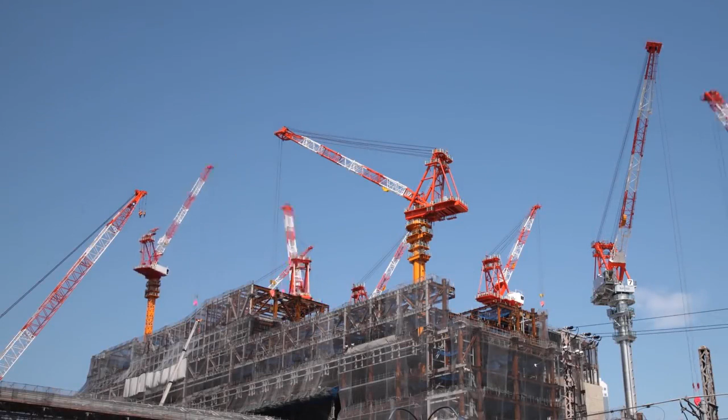The government has responded to this problem unsuccessfully with ridiculous attempts to ban rents from rising, a solution akin to banning a sick patient's temperature from rising. The only cure for this fever will be to increase the supply of housing. That is, increase the supply of housing while minimizing cost. Let's first focus on optimum height.

While some are calling for high-rise buildings in Dublin with the idea that it will lead to increased density and greater supply, buildings that are too tall don't translate into affordability as they cost too much to build. In theory, taller buildings reduce square meter costs of floor space the higher you build and increase the overall returnable revenue from a single plot of land. However, the cost increases as you build higher and higher.

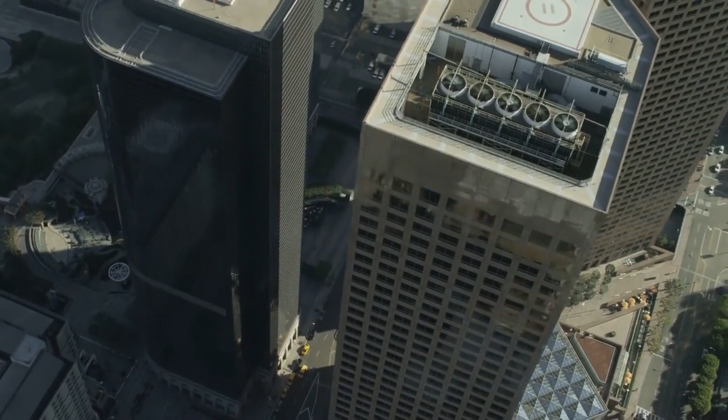Lift systems, fire prevention measures, water supplies and pressurization, and heating and cooling systems all add to the cost of high-rises. Costs like these lead to a U-curve in regards to the cost per square meter and height, where the cost per square meter initially decreases with an increase in height and then starts to increase after the height reaches a certain point due to the increased engineering demands. Every curve therefore has a bottom out point.

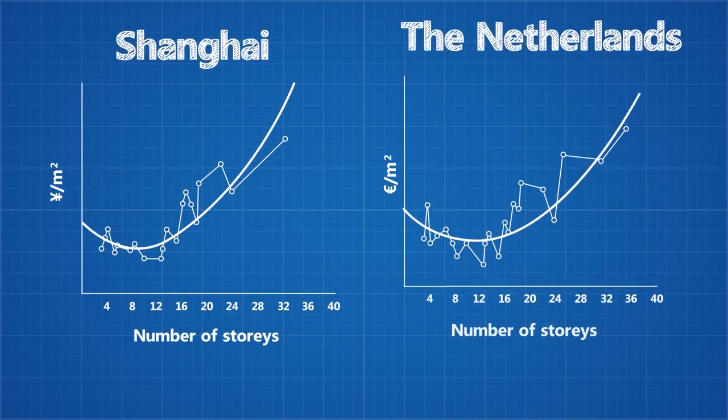This bottom out point is different in every city and varies widely even within the city. But on average, the lowest cost per square meter in Shanghai and in the Netherlands, for example, is around 8 stories. In Hong Kong, thanks to the limited land area increasing land cost, it's around 12 stories. The additional cost of engineering can be marginalized by high costs of land, making it worthwhile to build higher.

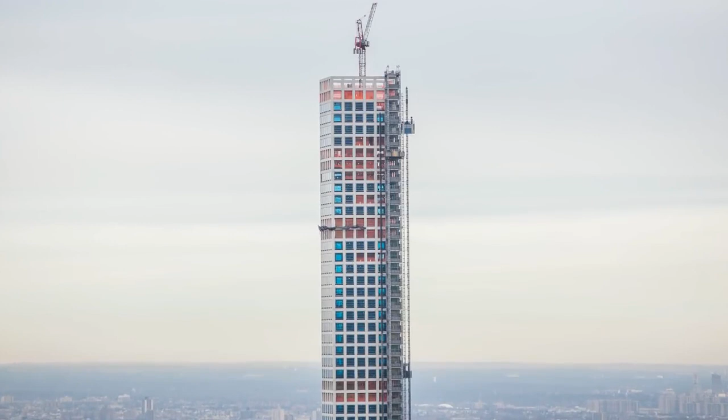Take the extreme example of 432 Park Avenue, the tallest residential building in the world. Built on the site the historic Drake Hotel once occupied, centrally located with Central Park views, the site became one of the most valuable plots of land in the world at 520 million. Now it goes without saying, this building was not constructed for the average man.

It has over 85 floors with 38,000 square meters of usable floor space, but only 104 units for people to live in, each costing millions of dollars. But the point stands, where there is exceptionally high demand, you can build higher. The cost of land in Dublin doesn't come close to those of Manhattan or Hong Kong though.

So in most cases, the bottom of our U-curve, i.e. the most cost-effective height to build to, will be between 6 and 8 stories, with a recent Irish government report even suggesting as high as 12 stories in some areas. Let's next focus on minimizing the building cost of these buildings.

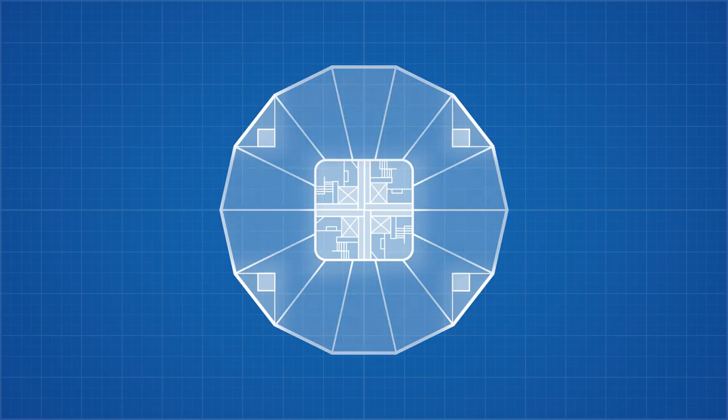One of the primary causes of increased cost with increased construction height is the necessity of using floor space for the structurally integral building core, which keeps the building standing and houses elevators and other services. While there are many ways to design the shape of the building, certain floor plate designs end up being more desirable than others to maximize usable space.

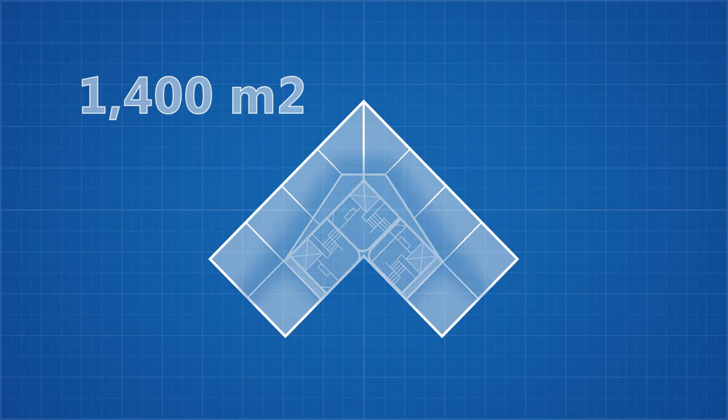Say that the gross area of the floor plate of this building is 1400 square meters. The core of the building of this shape and size would need to be around 335 square meters. This gives a net area of usable area of 1065 square meters, and thus a net to gross ratio of 1.31. So a design like this is stylish, but when you analyze the space efficiency, it's not great for maximizing floor space.

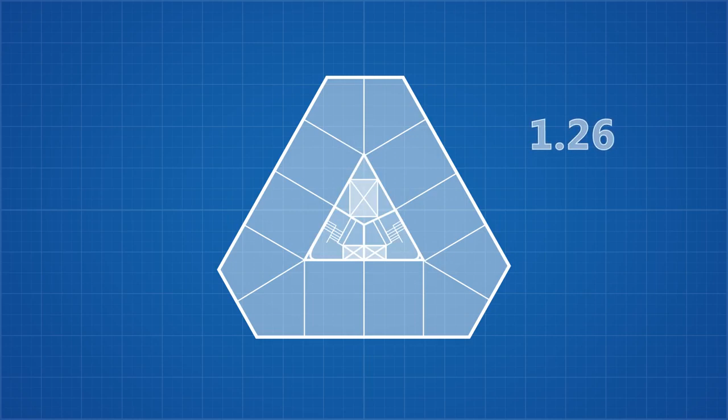While variety and expression in building design are important, these elements invariably add cost and require careful design consideration. When affordability is an issue, simpler designs are better. Wall-to-floor ratio is also a critical measure of cost efficiency. It expresses the perimeter length of the wall that has to be constructed for every unit of floor area, so from a cost perspective, the lower the ratio the better.

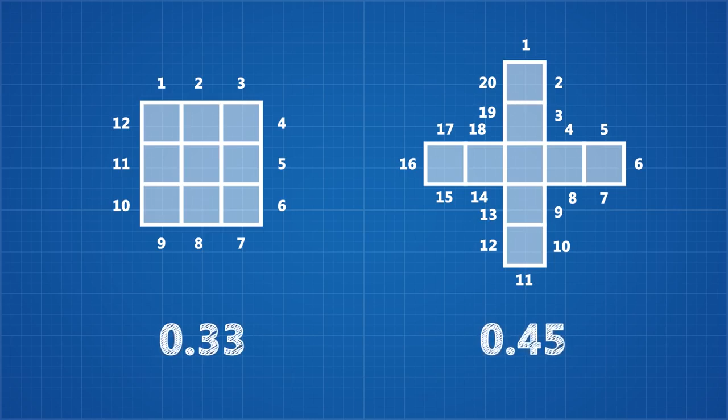Using simple geometry, we can see that a 3x3 square has a total perimeter of 12 meters. This would have a wall-to-floor ratio of 0.33. A cross shape with the same area of 9 square meters has a perimeter of 20 meters. This would have a wall-to-floor ratio of 0.45. When constructing buildings, this simple principle is the same. The more perimeter wall needed per floor area, the more expensive things get.

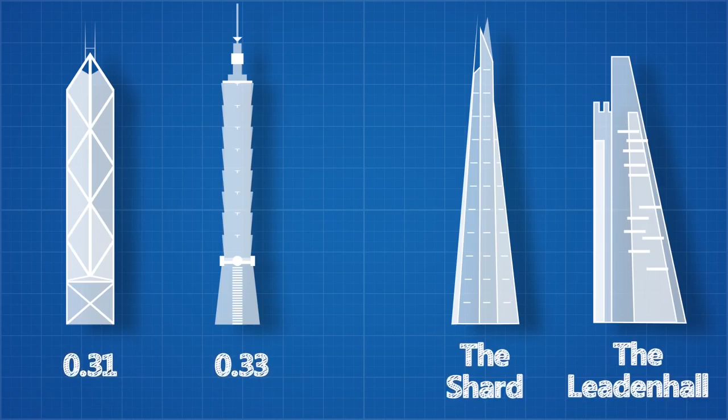A comparison of Asian and London towers provides an interesting contrast on approaches to wall-to-floor ratios. Tall Asian buildings score between 0.3 and 0.35, while London buildings score between 0.35 and 0.6, with the majority above 0.45. This is because the Asian buildings have larger, more regular floor plates with centrally located cores.

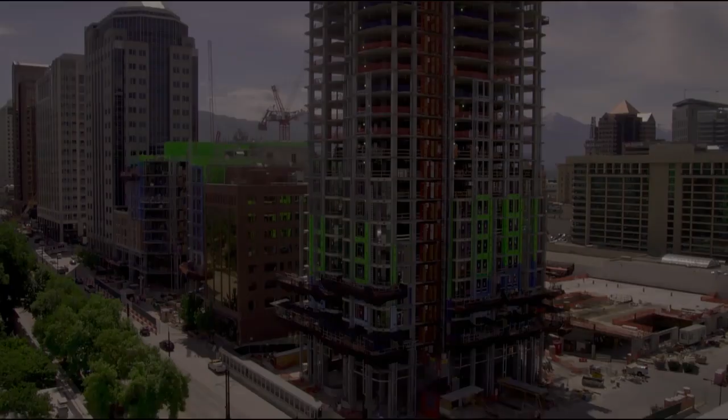So the design of our tower has huge effects on our cost, but so do construction techniques. Traditionally, towers are built using repeating floor design with molds called formwork being used to cast the concrete structure. Despite this essentially being a vertical assembly line, it can still be labor intensive and slow and is exposed to variabilities of site and weather conditions.

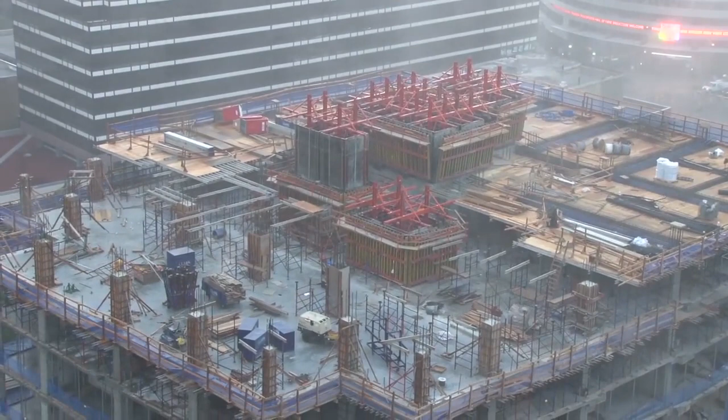Prefabrication and off-site construction is increasingly becoming an appealing option. This can offer high-precision solutions created in factory conditions and often reduce on-site delays and help progress construction even in a market with a skills shortage. On some construction projects in Dublin already, concrete products and timber frames are being fabricated off-site and assembled on-site.

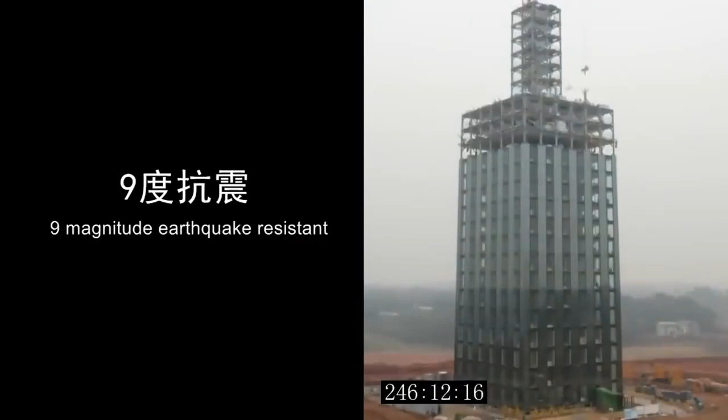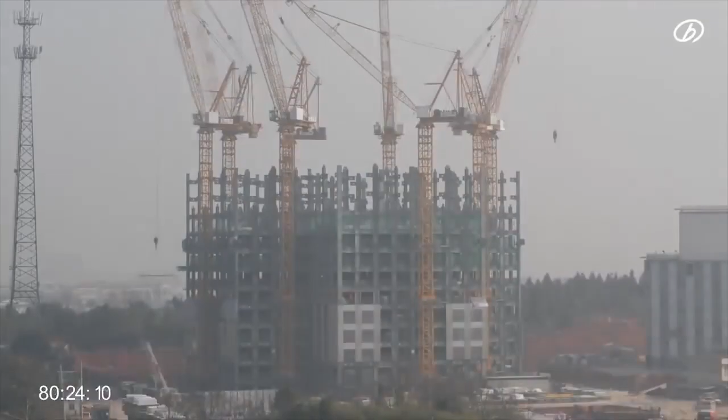An extreme example of this idea of prefabrication is being used in China, where a company called Broad Sustainable Building built a 30-story building in 15 days for a cost of just $1,000 per square meter, and later built another 57-story building in 19 days. The building pieces are fabricated in sections at 2 factories in Hunan.

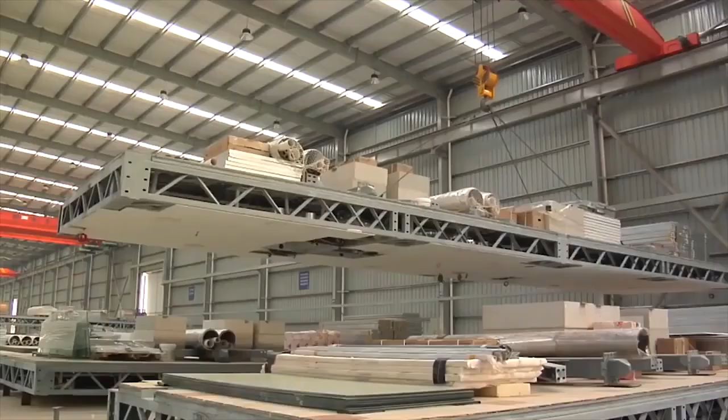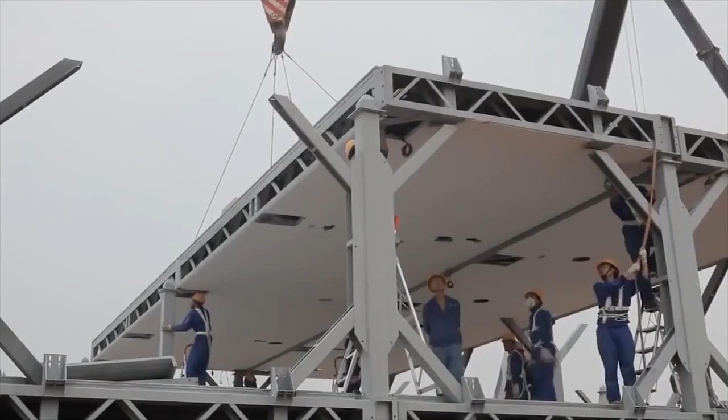From there, the modules, complete with pre-installed ducts and plumbing for electricity, water and other infrastructure, are shipped to the site and assembled like Legos or flat-pack IKEA furniture. The company is in the process of franchising this technology to partners in India, Brazil and Russia. What it's selling is the world's first standardized skyscraper.

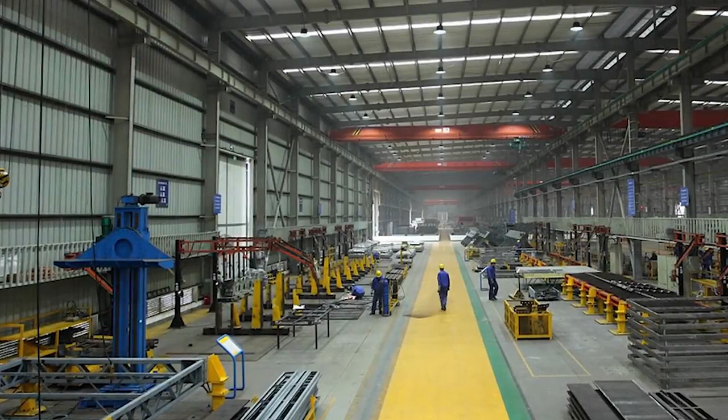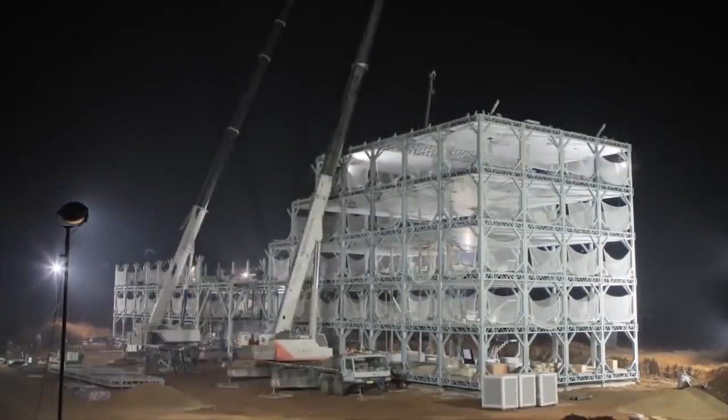One of the primary cost drivers for skyscrapers are the labor costs for specialized workers. By outsourcing much of the construction work to safer, controllable environments like this, we can reduce the costs. In a country like Ireland, where many of its skilled construction workers were forced to emigrate to Australia, New Zealand and Canada during the economic crisis, many of which have not come home, this may well be a solution that can help with construction.

Regardless of building techniques, policies need to change in cities like Dublin to facilitate quicker, cost-effective builds, while not being completely blind to future implications of relaxing regulations. Currently, 1 car parking space per unit is required for any apartment. In a city centre location where we would hope to move towards public transport solutions, this is a completely unreasonable regulation to have in place, especially when you consider the impacts of cost it has, with some reports estimating that this adds €30,000 per car parking spot to any building.

With our city populations growing more rapidly every year, we cannot hold on to past ideals. While the optimum height for minimising the cost of apartments may be 6 to 8 stories, we've discussed the benefits of building higher, beyond just the minimisation of cost, and how other cities have transformed themselves in a past video. Building higher facilitates cost-effective public transport, reduces commute times and creates a more livable city. We simply cannot continue allowing urban sprawl to be our solution. It is an unsustainable solution to a problem growing faster than we can keep up. We simply need to look at the ever-growing rate of homelessness in cities like Dublin for proof of this problem.

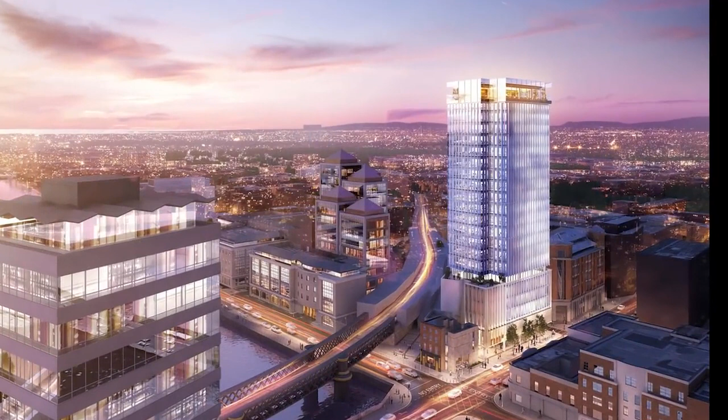In a city that lost hosting for the largest tech conference in the world due to a severe lack of infrastructure, the Dublin City Council deemed it sensible to refuse planning permission to this 22-storey hotel on Tara Street on the grounds that it would have a significant and detrimental visual impact on the city skyline. A skyline dominated by 2 industrial chimney stacks, while functional modern buildings that are desperately needed in the city are continually blocked.

And this isn't a problem exclusive to Dublin. San Francisco, a city notorious for skyrocketing cost of accommodation, has an average building height of just 3 stories, mostly due to similar restrictions in building heights. Washington DC has some of the worst traffic in the US, and it has height restrictions blocking anything taller than its national monuments. In large cities with restrictive height regulations, you can almost be guaranteed socio-economic problems will follow.

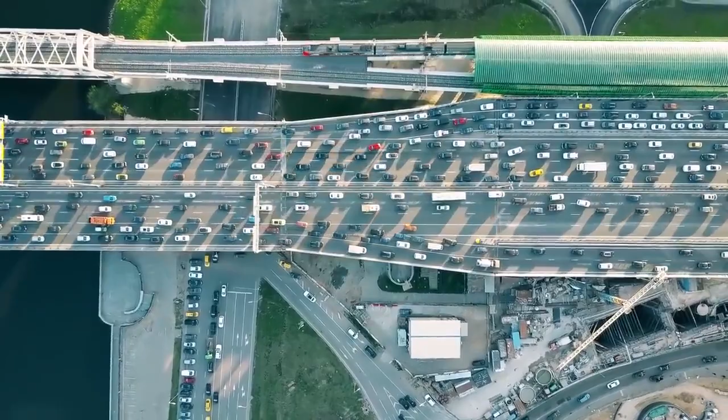In all reality, this problem has so many facets beyond just engineering challenges. This is a problem that primarily affects young people, and those who already own their home have little interest in devaluing it by allowing high-rise developments near their home, and thus increasing supply. There are political motivations and many more factors that change why and how bubbles like this occur in different cities, but if we're going to build a sustainable future, we are going to have to rethink how we build and plan our cities. Perhaps we can start using machine learning algorithms to analyze and suggest changes to optimize our cities.